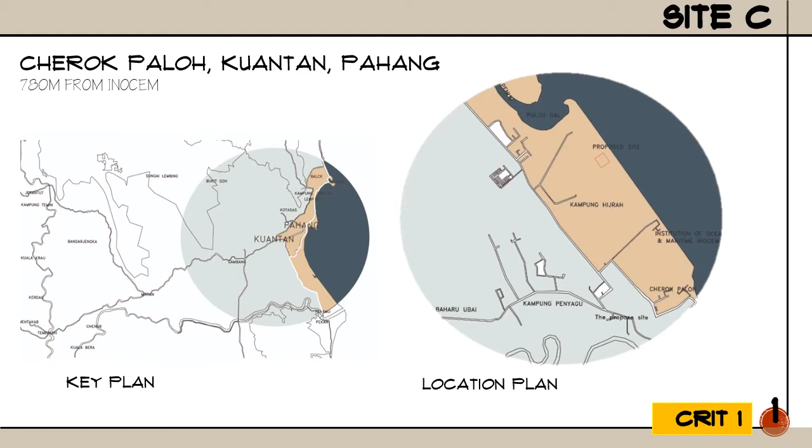So the Site C is located at Cherok Paloh, Kuantan, Pahang, which is 780 meters from Inocem, and the nearest neighborhood is Kampung Hijrah. This is Site C. As Site C is fully covered by trees, the trees on the proposed site have to be relocated to the empty area. This allows road access toward the site and gives a bigger area on the proposed site.

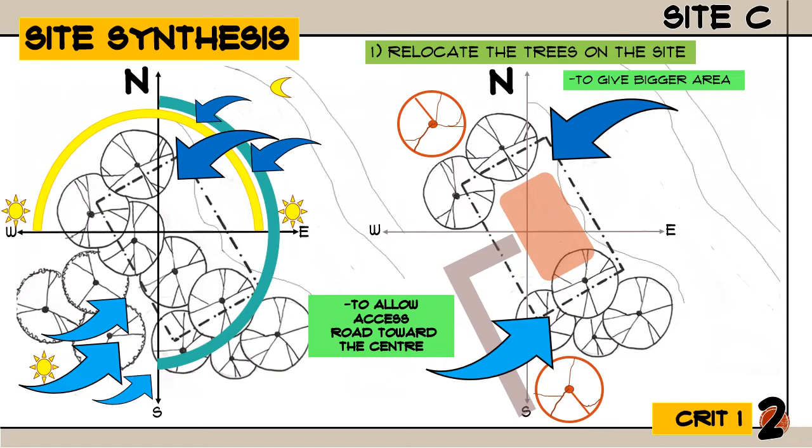The prevailing wind is the best opportunity at the coastal area. Therefore, the building should be orientated more toward northeast and southwest. They are called sea breeze and land breeze. The openings for the building should be bigger so that they allow good natural ventilation.

As the proposed site is beside a beach, the building should be elevated to avoid flood or rise of seawater level. The beach sand is weak, therefore the friction pile is suitable for the foundation. And lastly, the site has to be protected by brick fences to avoid wild animal threat and crime.

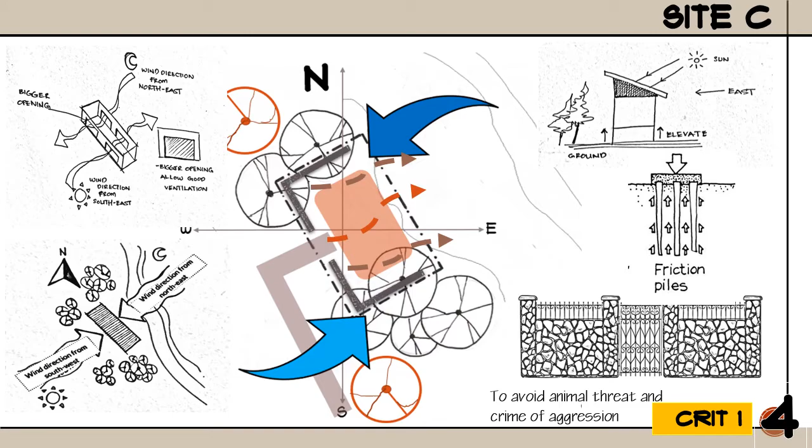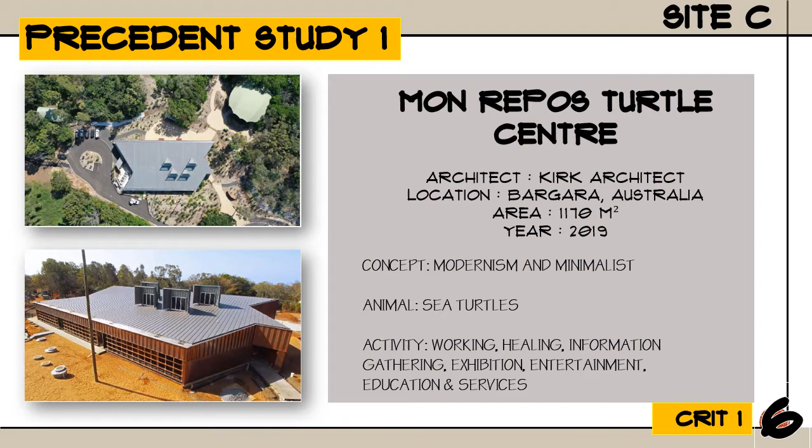Mon Repos Turtle Center. Mon Repos Turtle Center is located at Bargara, Australia, and the building is designed by Kirk Architect. The area is 1,170 square meters and the building was fully developed in 2019. The architect chose modernism and minimalism as the concept, and the center is focused only on sea turtles.

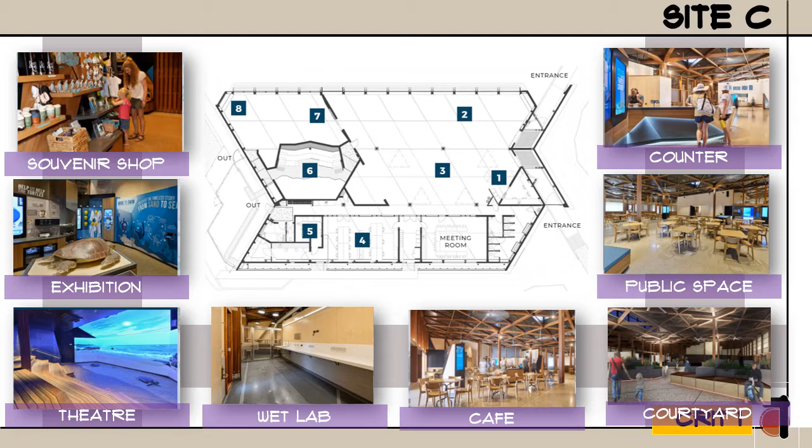The Mon Repos Turtle Center is very huge. There are many highlighted spaces such as exhibition, theater, wet lab, etc. It also has a courtyard inside the building that acts as the focal area. The building was primarily constructed using timber for structure and linings. The glulam diagonal superstructure is able to reduce the overall material use and increase spans between glulam tree columns. The use of timber meant the project could fulfill the 50-year design life in the corrosive marine environment.

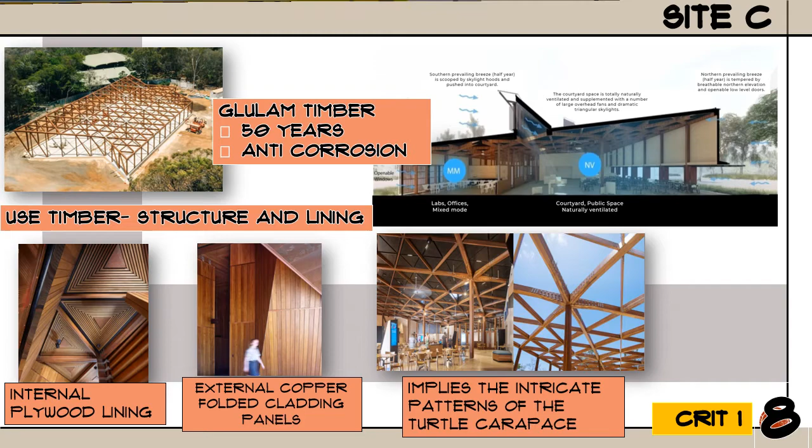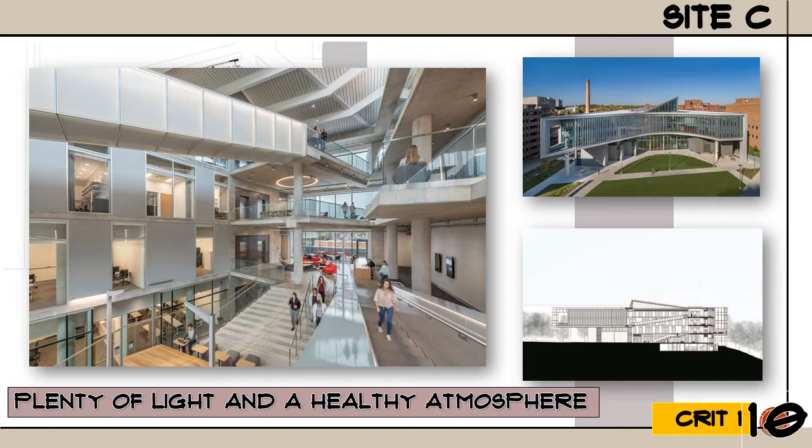A curvilinear building, a combination of high-performance construction and cutting-edge design. The building has plenty of light and a healthy atmosphere, which is meant to encourage a sustainable environment by using a huge glass wall. The ramps and stairs provide sculptural visual interest and allow views into the classroom and labs, together with promoting wellness and reinforcing the notion of healthy activity through design.

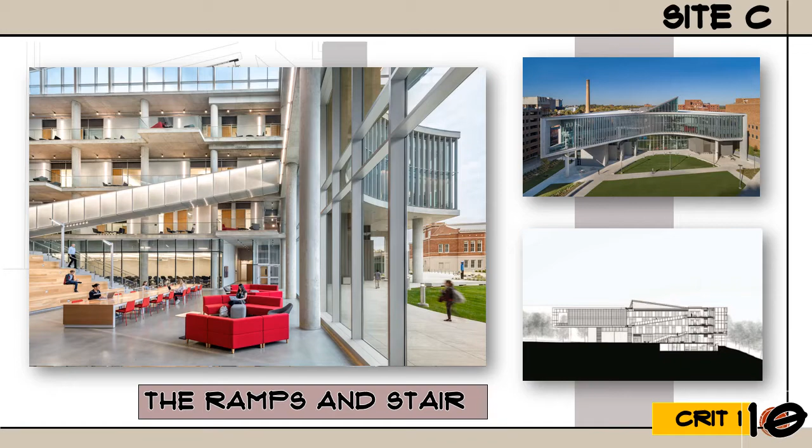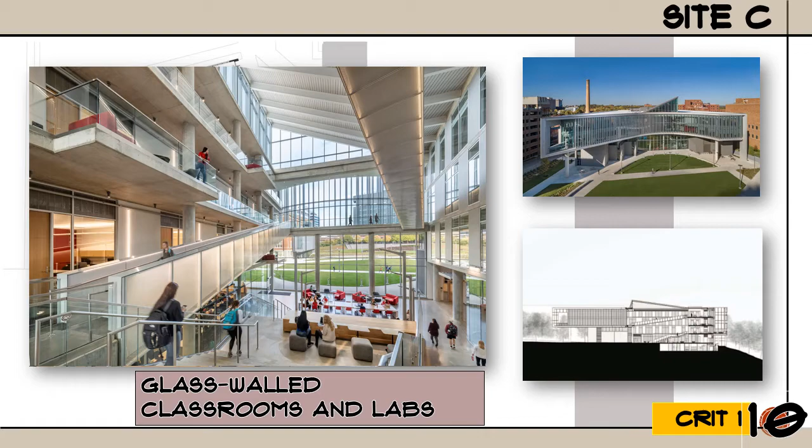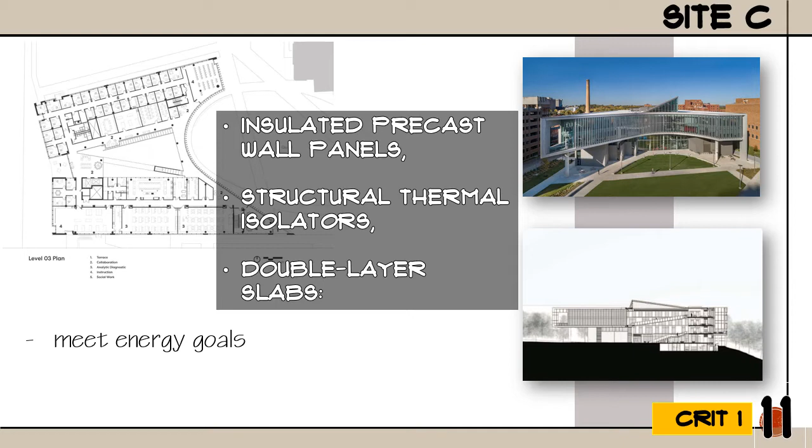The glass wall classroom and labs feature large airy breakout areas along with adjacent balconies, providing opportunities for informal discussions and project work. The building used insulated precast wall panels, structural thermal isolators, and double-layer slabs. Together, these features help meet energy goals.

Synthesis of precedent study. From precedent study 1, I learned that the concepts used are modernism and minimalism. There are many main spaces that are required for a sea turtle rehabilitation center, and glulam timber can last up to 50 years without worrying about corrosion.

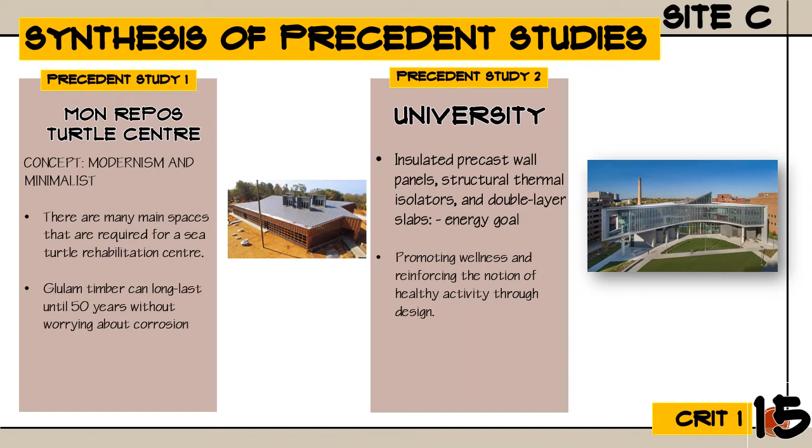From precedent study 2, the university, I learned that the use of insulated precast wall panels, structural thermal isolators, and double-layer slabs can actually meet the energy goal. It also promotes wellness and reinforces the notion of healthy activity through design.

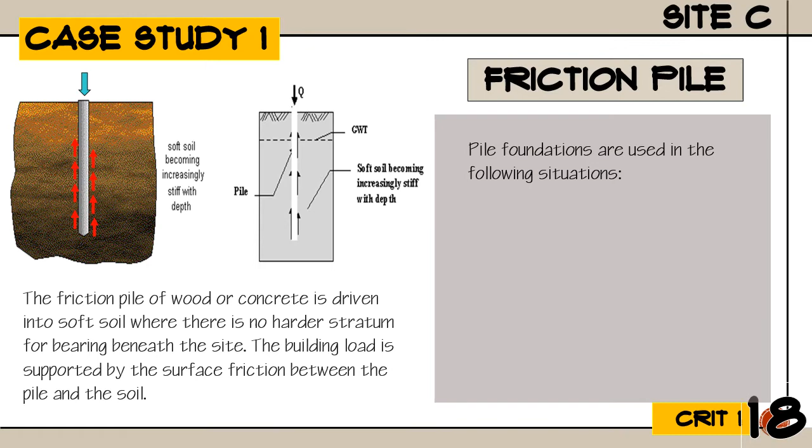Friction pile. The friction pile of wood or concrete is driven into soft soil where there is no harder stratum for bearing beneath the site. The building load is supported by the surface friction between the pile and the soil. The pile foundations are used in the following situations. First, when there is a layer of weak soil at the surface and the load has to be transferred to the layer of stronger soil or rock below the weak layer.

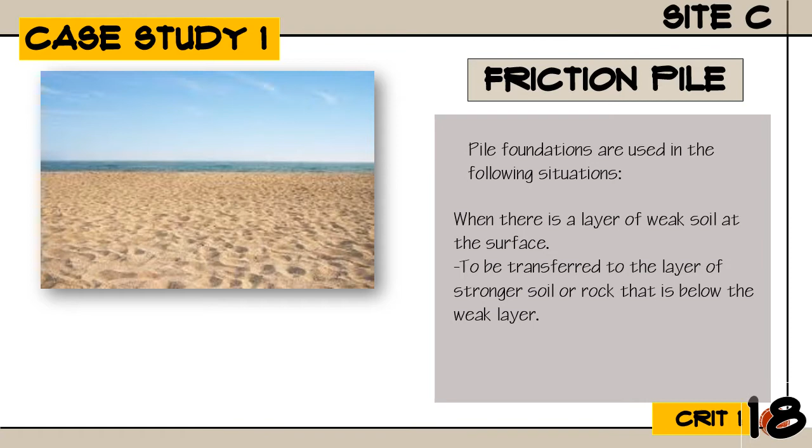Next, when a building has very heavy, concentrated loads such as in a high-rise structure, bridge, or water tank. The advantages of the friction pile are that it can increase the density and therefore the strength, and it can be used for heavy loads and for long spans.

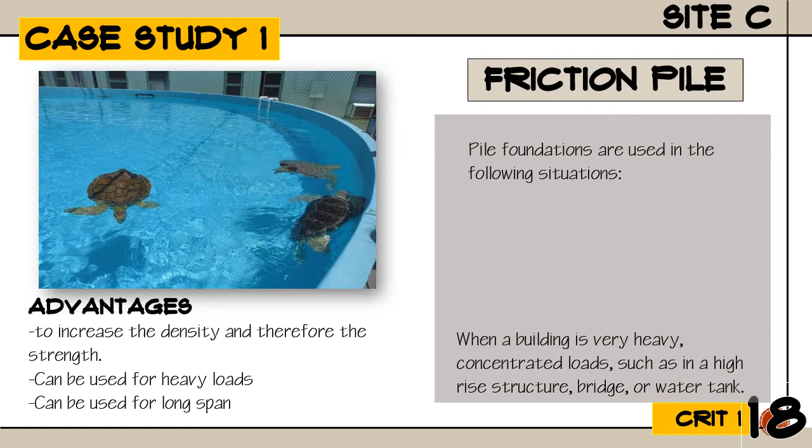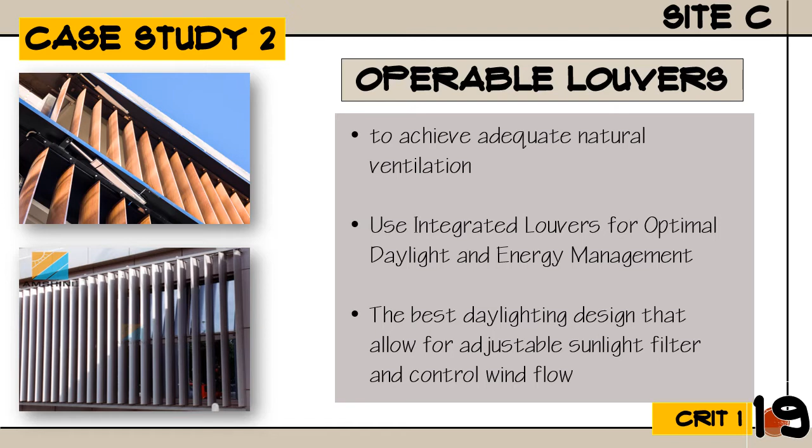Operable louvers. The function of these operable louvers is to achieve adequate natural ventilation, and the use of integrated louvers is for optimal daylight and energy management. Also, the daylighting design allows for adjustable sunlight filtering and controlled wind flow.

One of the advantages is it can deliver flexible heat and light control. It can provide maximum daylight control. The best daylighting and privacy results can be achieved by installing windows with advanced louvered glazing technologies.

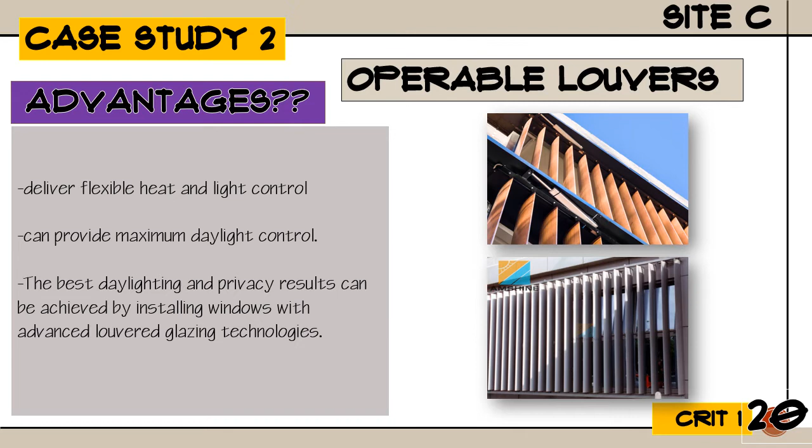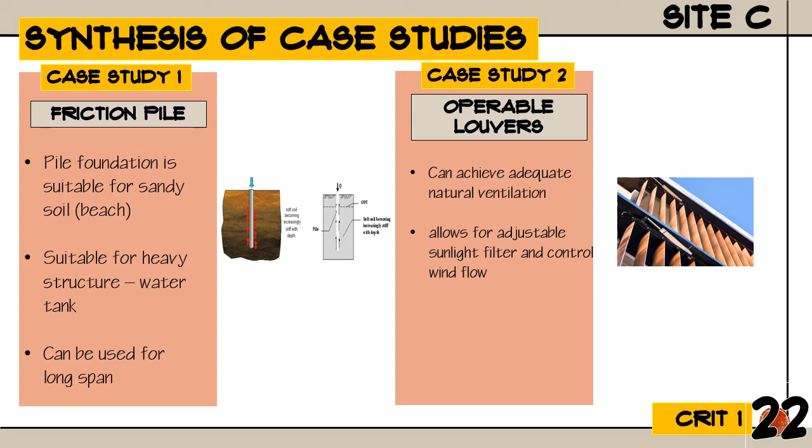Synthesis of case study. From case study 1, the friction pile is suitable for sandy soil. It is also suitable for heavy structures, especially ones with a water tank. It also can be used for long spans. The operable louvers can achieve adequate natural ventilation and allow for adjustable sunlight filtering and controlled wind flow.

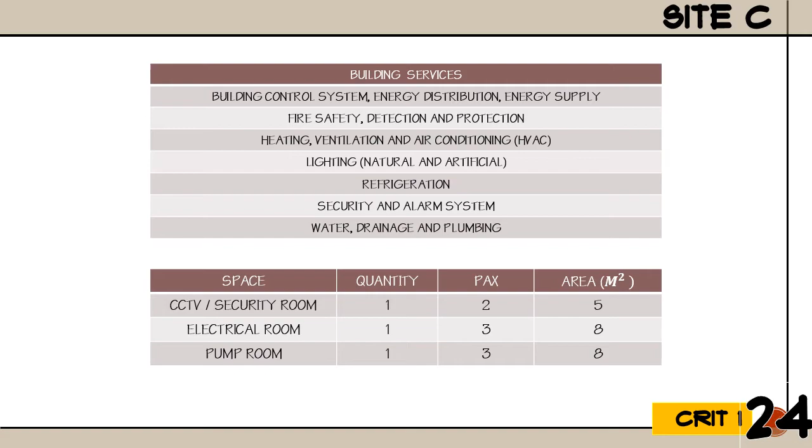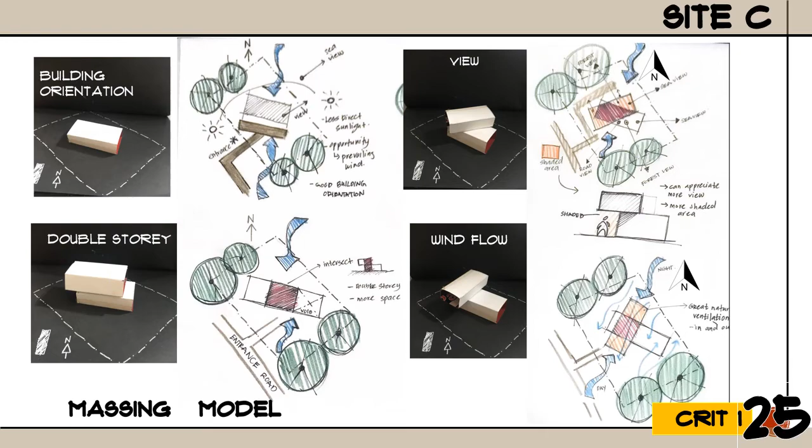So this is the massing model that I want to focus on to find the best building orientation based on the site synthesis. Zoning mood. In this part I want to find the mood of the spaces by observing the nearest context around the proposed site. From here you can see there are three moods, which are public, private and semi-public. As the result, I can create a basic design to show the mood space according to my observation.

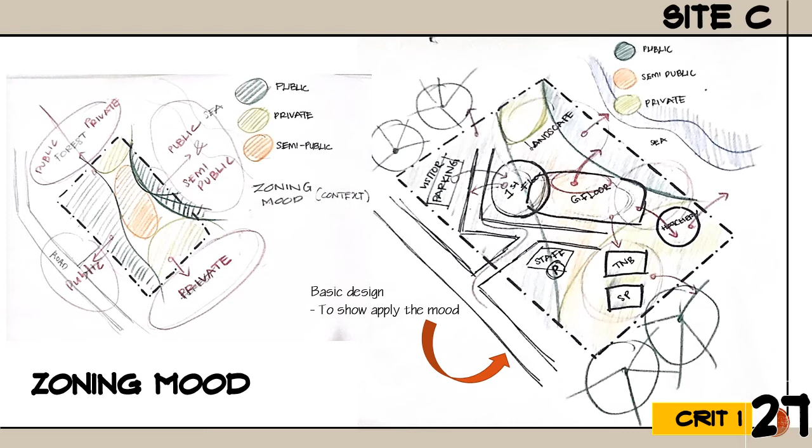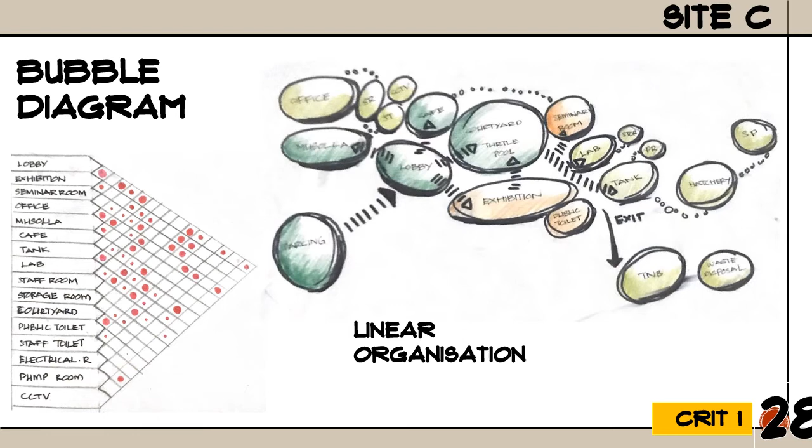So from the matrix and the mood space that I have created, the bubble arrangement follows the mood and the relationship between the spaces. The bubble diagram on the side shows how the bubble arrangement can interact with the prevailing wind, the sun orientation and the context.

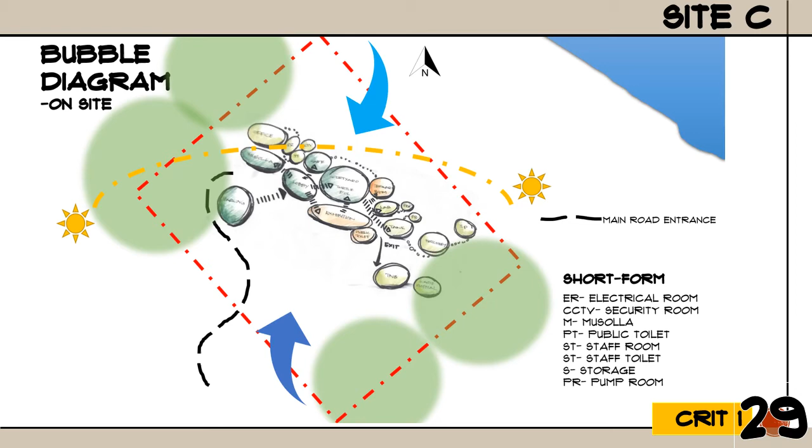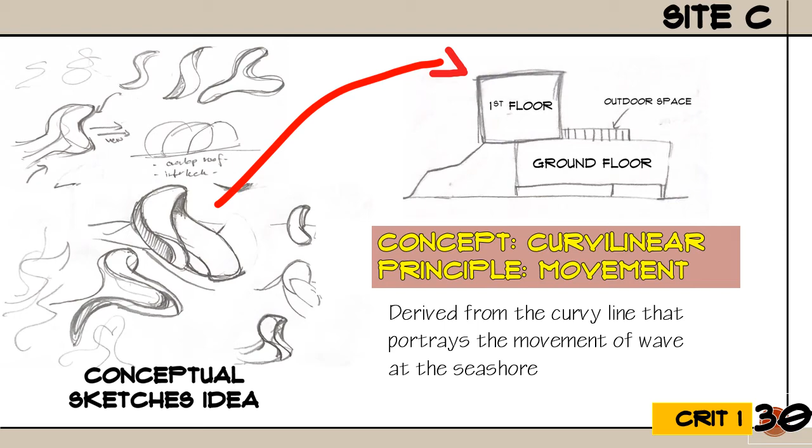Now here is the design concept stage. The chosen concept is curvilinear and the principle is movement. This is because the concept is derived from the curvy line that portrays the movement of waves at the seashore. From the S-curvy line, I developed it more to find a better shape. But instead of finding the shape by rational thinking, I chose to play with the shape using my bubble diagram. And somehow, the basic shape of the building suits the arrangement of the spaces.

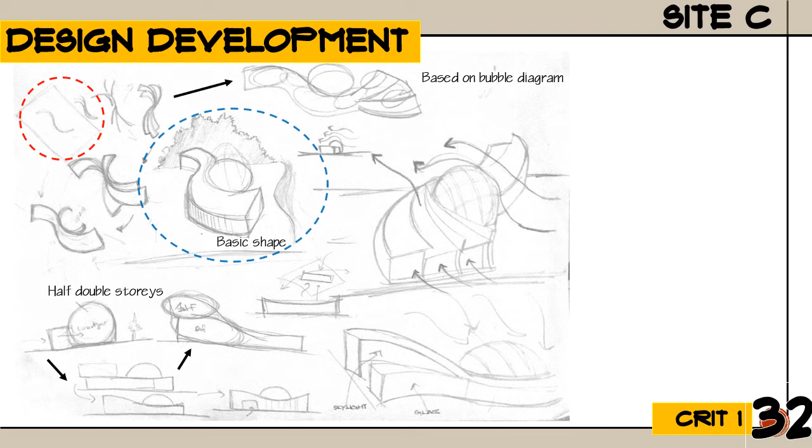This is just the idea development, and also to put in what I have got from the precedent and case study, such as skylight, glass wall, louvers, and also the scale-shaped facade. To bring the identity of the sea turtle, I got the idea to have the pattern of the sea turtle shell in my design.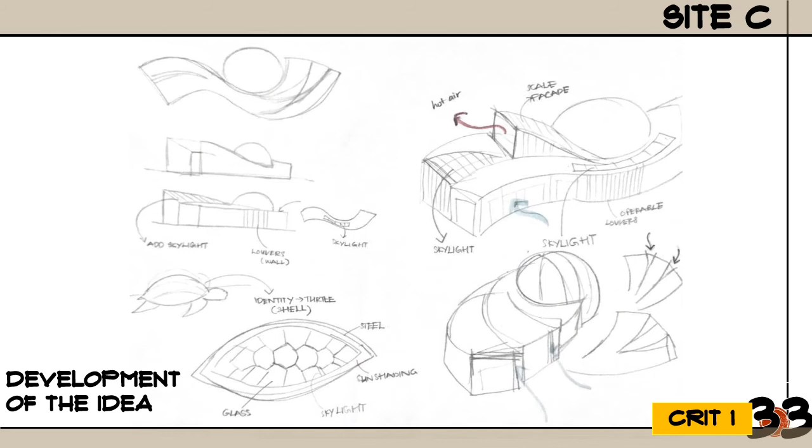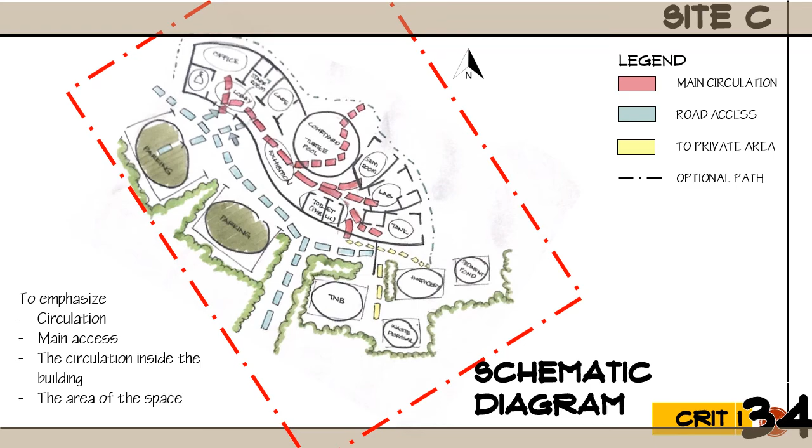Schematic diagram. For this schematic diagram, I want to emphasize the circulation and access, the circulation inside the building, and the area of the spaces. This is the floor plan. The plan is divided asymmetrically at the center of the building, which is at the courtyard. The first floor is located at the left wing and there is an office area, and I put it together with the staff room and the staff toilet. Visitors who want to see the turtles will be entertained with a huge exhibition area, which is beside the courtyard as well.